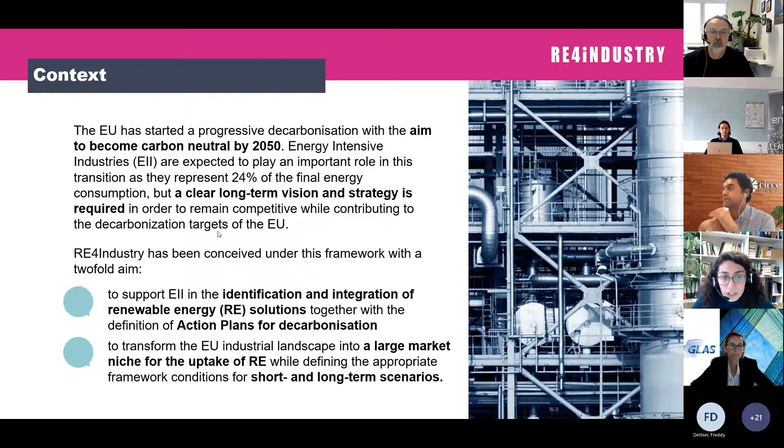You can see some of the goals of the project. I will only name a couple of them, which are really important. The project is really special because we are trying to set up a multi-actor collaborative network, involved and actively committed together, to identify the needs of the sector in order to make this transition possible. What we are trying to do is initiate a stakeholder dialogue where every stakeholder will take part and help us with these decarbonization goals.

Here you can see the general project workflow. Like other Horizon 2020 projects, ours also consists of different work packages, with different activities and tasks involved in these work packages. I'm going to give you more detail about our technical tasks in the following slides.

As I mentioned, what is important about our project is that we have a collaborative network formed by national level and European level experts. We have technical and policy experts, and it's important to have them to show our project results, project progress, and also get their ideas.

What else we are doing is looking at the status of energy intensive industries on country level - Germany, Spain, Netherlands, Greece - as well as on the European level. And we are looking into the best practices for renewable energy integration in energy intensive industries.

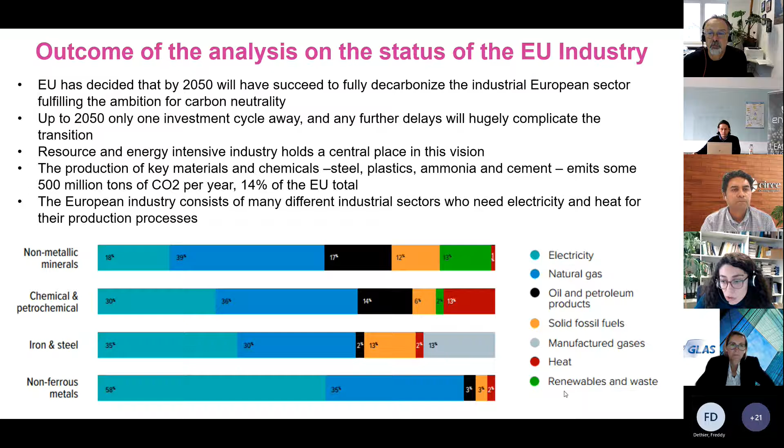When we look at renewables and waste, we don't see them used so often. Only a small part is used in the chemical and petrochemical industry, and 13% is used in non-metallic minerals. This should be another aim - if we want to achieve our decarbonization goals, we have to integrate renewables more in this sense.

Other activities we are carrying out involve looking at case studies of the energy intensive industries which are in the project consortium as well. We are looking at innovative solutions for renewable energy adaptation in these energy intensive industries. Here you can see our case studies: Sidenor, Corbion and Mytilineos.

What we are looking into is that instead of normal electricity, we want to get electricity from green sources, like power purchase agreements, photovoltaics, etc. Instead of natural gas, we aim to replace it with biomethane or green hydrogen. Instead of coal, biochar, even though it has lower efficiency, and instead of steam, electric boilers.

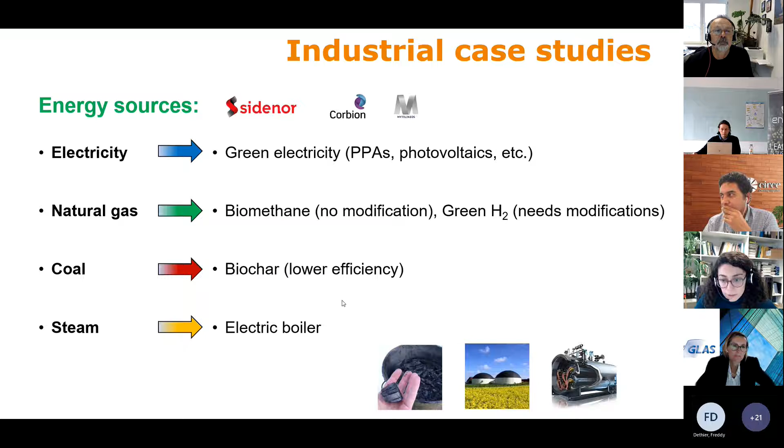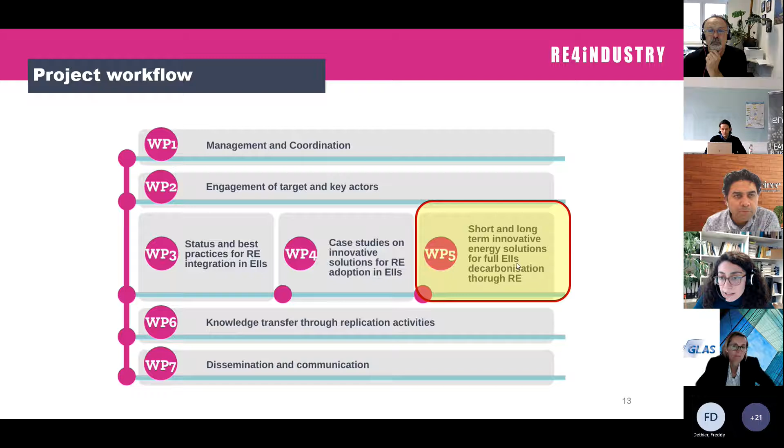And we are also looking at the short and long-term innovative energy solutions. We are developing roadmaps for full energy-intensive industries decarbonization through the renewable energies. Short-term vision is for 2030 and long-term vision is for 2050. We are looking into the technology options, achievable rates, as well as current sector needs.

And here I'm going to recap our RE4Industry actions really quick. We are aiming to have a strong engagement strategy following a multi-actor approach, also starting a dialogue with and within energy-intensive industries and energy-intensive industry organizations. We are also having a thorough review of renewable energy technologies and options for 100% renewable energy production by 2050. Also insights into industry retrofitting, and we are producing recommendations. We are carrying out multiplication and replication tasks, and we are disseminating our results, and we have a solid communication strategy.

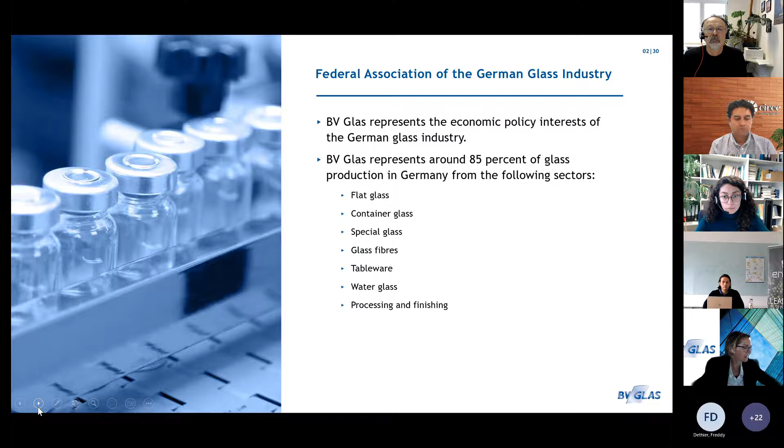So we're the National Association for the German glass industry, representing all the sectors: flat glass, container glass, special glass, tableware, water glass, and processing and finishing. This is our team. I'm the advisor for energy and climate. We're also really active in environment policy, product policy, and also statistics.

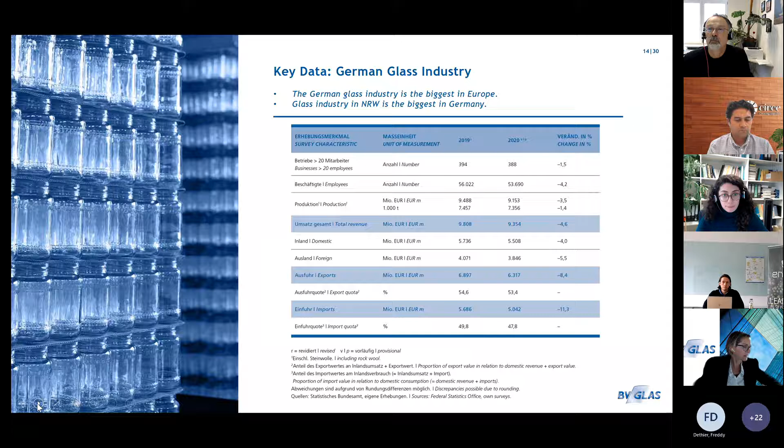I think you also put the spotlight on the final energy consumption. There you can see that especially in the glass industry, you use a lot of natural gas - almost 80% of the final energy used is natural gas. So it's a big part that needs to be decarbonized.

As I mentioned before, there will be electrification, there will be hydrogen, there will be syngas - all the options that need to be explored to make this gray part into a green part as we move onwards to 2045.

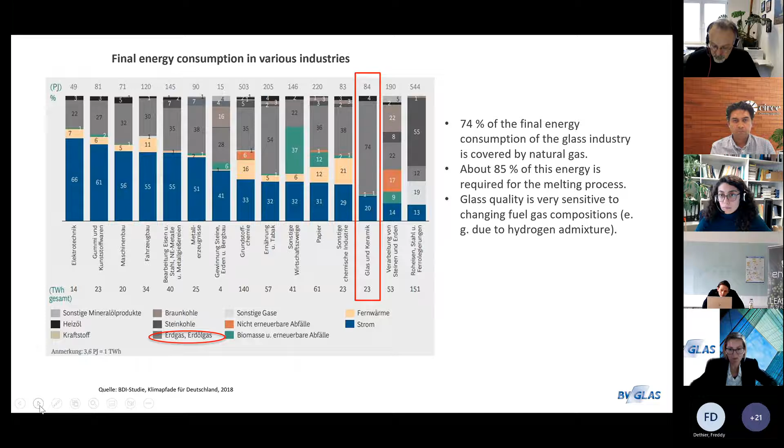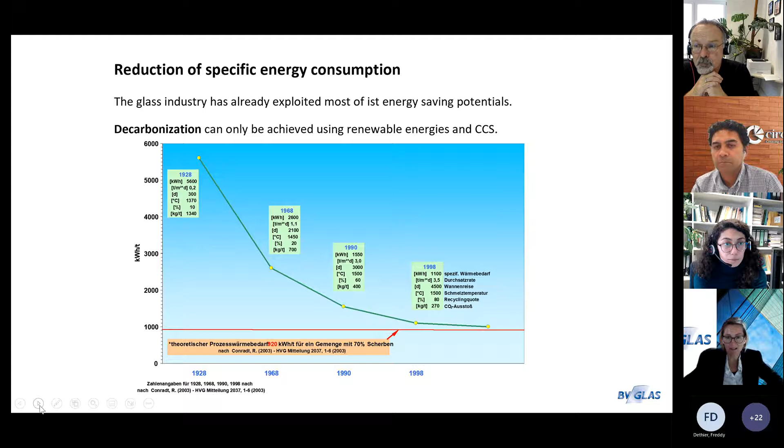The reduction of the specific energy consumption has declined over the last decade, so in point of energy efficiency, we're still working on it. BV Glas itself is leading some energy efficiency networks. We're supporting the national initiative of energy efficiency, but what we do need to focus on right now is decarbonizing the energy we are using.

I'm not sure if I should give you a quick overview of glass manufacturing, because we have so many experts around the table. Just for a quick close-up, we have the glass oven where the raw material and recycled glass cullets are being molten, using up the most part of the energy.

Gas-fired furnaces with electrical boosting are right now the standard. In some cases, for special glass industry or some smaller flaconnage production, there are also full electric furnaces.

But using full electric furnaces is not possible for every kind of glass and not for all sectors. For example, if you take a large flat glass tank which produces up to 500-700 tons of glass a day, you have to have a very high quality of glass, and the chemical process needs to be supported by very high energy input, and the glass has to be really clear. So it's not possible today to build full electric glass furnaces which melt over 200 tons a day.

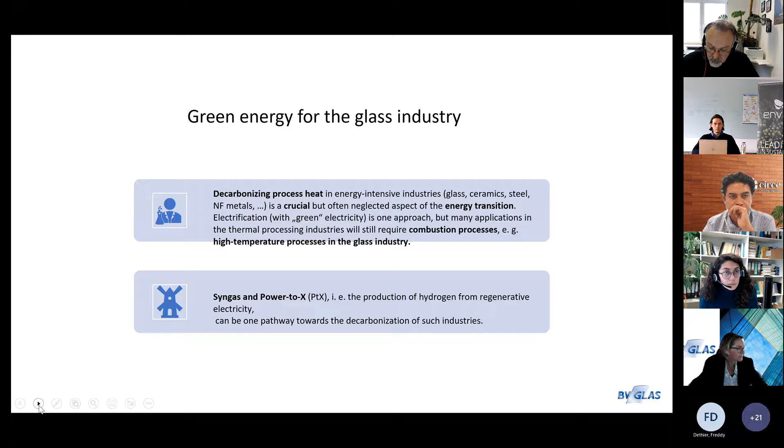Here I just showed a chart, actually from another project, from the project HyGlass, just showing the figures. Right now you see the H2 admixture rate, but of course you could take a sustainable gas also in exchange for natural gas, lowering the CO2 output of the glass industry. In Germany, we're using right now 16 terawatt hours of natural gas and emitting 4 million tons of CO2, just for the overview for the German glass industry.

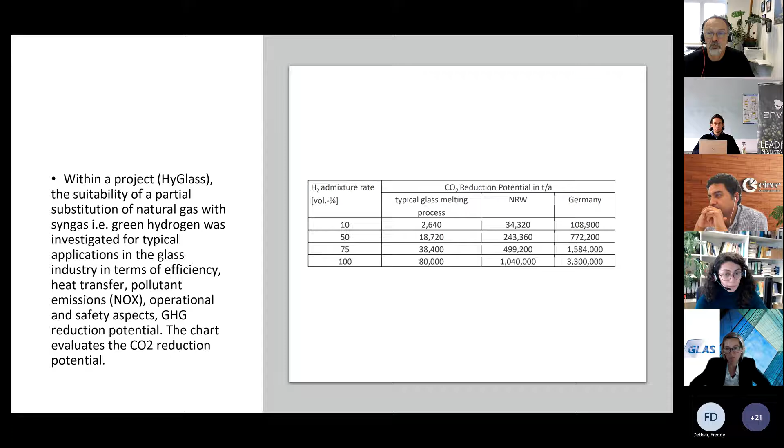So thank you very much for listening. I'm very excited to hear what the technical experts will say, because what we need in the glass industry is a very stable gas.

Because the chemical and physical process of glass melting is highly sensitive, what the people in the factory do not want is a gas that is changing every few hours or every few days, so you do not get the optimal quality. It's a highly efficient process, so what you need is a stable, predictable gas to make the best quality glass possible, supporting energy transitions, high insulating glass, and good products, and to run the oven in a very energy efficient way. You need a very stable gas to support all the technical features you have.

I'm very happy to hear all your technical discussions and input on that. Thank you very much.

Many thanks, Christiane, and thanks also for highlighting that I believe the requirements on quality and purity of syngas are probably highest in the glass industry, even compared to other energy-intensive industries. We will proceed with the presentation by Hendrik Steinort from Enviva, who will talk about green carbon security, cross-sectoral bio-based defossilization of hard-to-abate industries. Hendrik, the floor is yours.

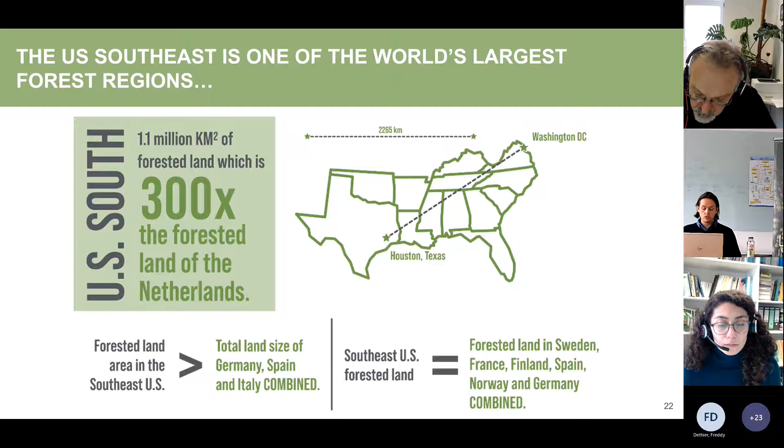Then we have set different priority criteria on how we should use biogenic carbon, and the first is, of course, optimization of recycling rate - what is the existing biogenic carbon in the value streams in a particular industry?

And then in the end, we can use biogenic carbon capture and storage and utilization in order to use maybe the residual carbon streams, such as CO2, for higher value applications, for example in syngas. Then priority 2: use of biogenic carbon sources.

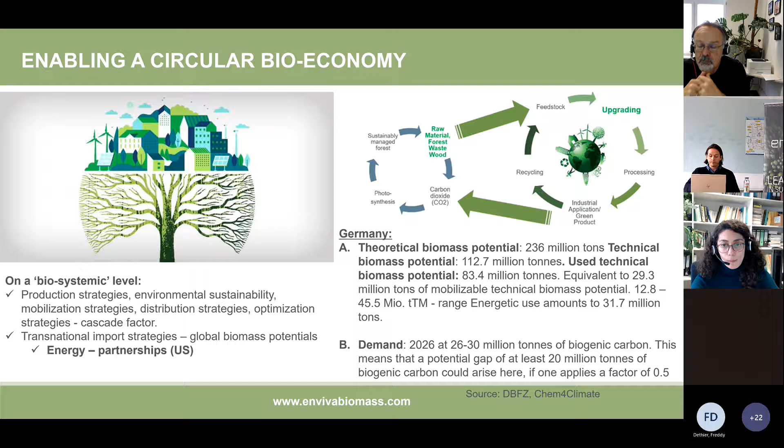Then I want to go quickly to the actual use case of these biogenic carbon resources, in the form of bio-to-X. We have biogenic carbon, and we transform it to X.

For example, syngas for heat processes in the glass industry. And here we have basically the climate champion: wood pellets. It's a defossilization platform, it has zero carbon cost, and a very homogeneous quality.

It can be used for process temperatures up to 1,600 degrees, and it is available at scale globally — 50 million tons, with an upward trajectory in the next years.

And then the biogenic carbon can be used as a green carbon source for biopolymers, for green heat, syngas, biomethane, bio-SNG for the glass industry, green hydrogen, but also for biomethanol.

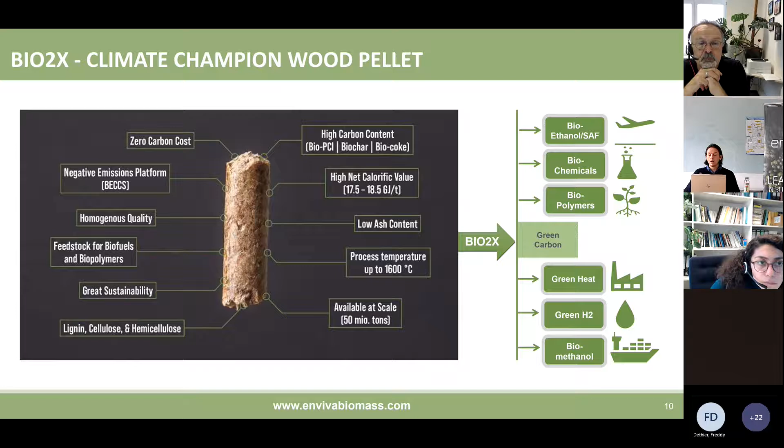And what are the strengths, apart from those I just mentioned? We all understand that we're in a carbon-constrained world, and the carbon-intensive economy will not go away. Decarbonization is looking probably more at the energy sector, but we need for all of these industries a strong carbon basis that is regenerative, renewable, and sustainable.

And the fossil infrastructures, for example in the glass industry, the ceramics industry, but also in the cement and lime industry, and in the steel industry — if these technology pathways are scaled up, they can be recycled.

There can be low cost, low capex implementation of renewable infrastructures in formerly fossil infrastructures. And we also can use hybrid systems where we have natural gas and mix it with syngas, for example, derived from biomass gasification.

One very crucial thing for capex investments and long-term OPEX is investor security. That can only be achieved if you have a global supply that is reliable, long-term, and maybe even at a fixed price. And sustainability remains at the heart of the transformation - we can't go beyond the criteria set out by RED3.

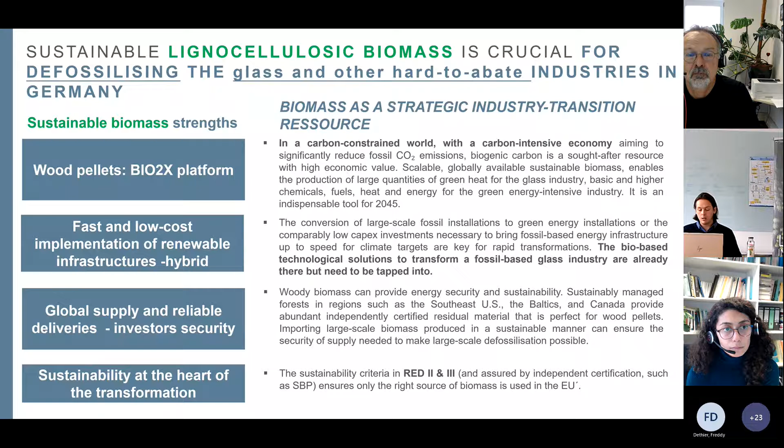Here we have another overview of what wood pellets as a defossilization platform can be. For us, relevant is syngas. It can be used as a process heat reducing agent, but also as a precursor for other higher value chemical platforms - around 10 to 12 gigajoules per normal cubic meter. What's crucial, depending on the process, is that for 1 kilogram of wood pellets you can probably produce 2.4 kilograms of syngas. That gives a sense of the scale.

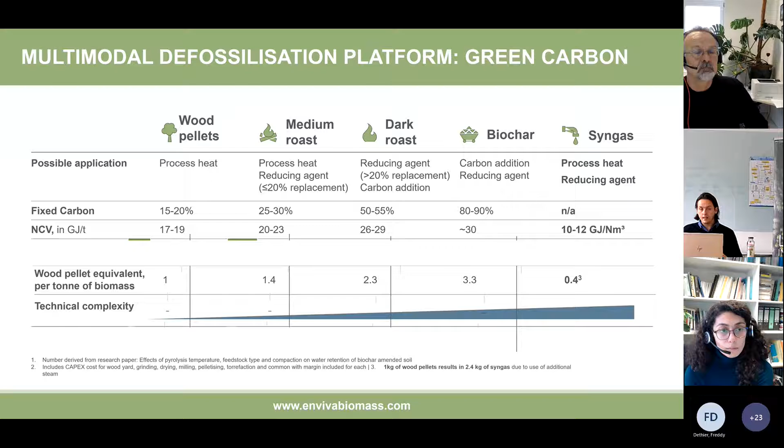Now we go to scalable biomass gasification. It's a very interesting modality to potentially defossilize the glass industry. It can be used cross-sectoral, not only in glass, but there are symmetries in other industries like ceramics, lime, steel, and cement.

We can either look at an approach where gasification is used in-house, creating value in-house, or a contracting model where you bring in external expertise, which will accelerate the transformation process while also looking at future applications of that process in these industries. That's also coupled with HR expertise transfer and professionalization of these industries.

We have different technologies on the market - fixed bed gasifiers and fluidized bed gasifiers. Later we'll hear about some of these technologies and how we can use them. Biomass gasification is more efficient than fermentation because you can scale it and it's immediate. Fermentation to produce biomethane is an established process, but if you want to scale it for a given industry, biomass gasification is the fastest pathway to scalable amounts of syngas, which can be upgraded to bio-SNG or biomethane as an equivalent to natural gas.

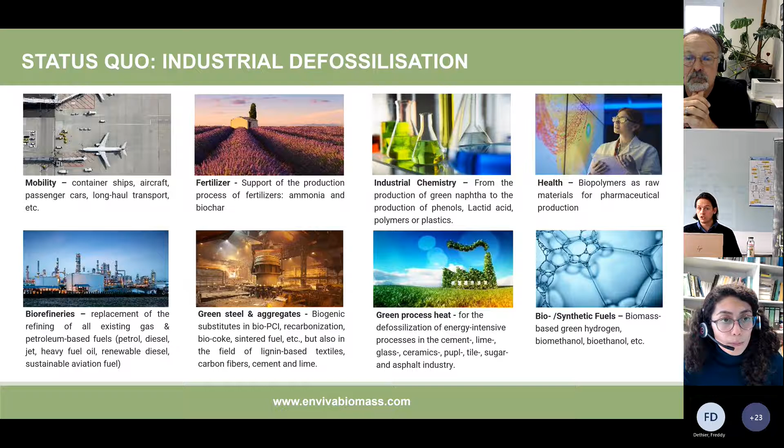Last but not least, at the very tail end of this process, if you have biogenic CO2 - renewable CO2 coming out of the process - and you capture it, then the glass industry can become a climate positive industry. By 2045, Germany will be climate neutral, but until then we'll need negative emissions because there are some emissions we can't easily abate. So that's something to keep in mind - why biogenic CO2 also generates additional value for these industries at the end of the process.

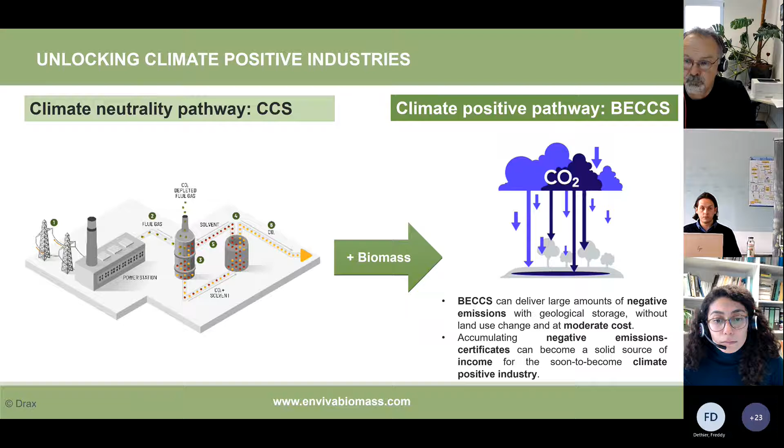Sustainability is the most crucial aspect of this value chain proposal. The biomass provided from different providers can rely on sustainability criteria such as FSC, PEFC, Sustainable Forestry Initiative, SBP - Sustainable Biomass Program - or the Tree Farm certification scheme. At Enviva we have a responsible sourcing policy that can only source from growing forests.

With track and trace, you can trace back with a satellite-based GPS system every ton of wood delivered to you, down to the plot where it was harvested. We also have a fund for high biodiversity plots, and we actively contribute to reforestation there.

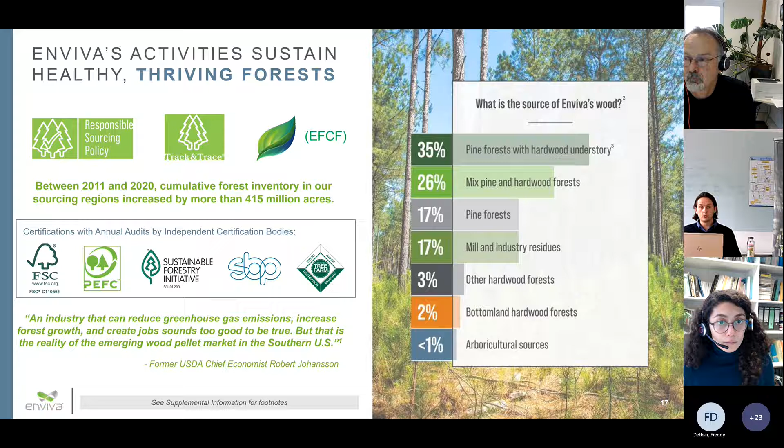Many thanks, Hendrik. I would have one question concerning the current development on European level on sustainability aspects, namely the discussions towards RED3. This will be nothing new to you, of course. The keyword is this primary biomass issue. Would you be bold enough to say a few words there? How is your approach? It might affect your business model, no? Yeah, that's a very actual question.

I could go into the details, but I think I'm going to look at the meta level. 80% of the renewable heat currently produced in the European Union is derived from biomass. 50% of that is derived from primary woody biomass. If they got rid of it in the next 2 years, there would not be any renewable heat for Europe. What we've seen in the difference between the position of the Commission, which was quite in favor of the status quo in RED2, is that the European Parliament followed more or less the recommendations set out in the ENVI committee, which later went into discussion with different committees in the European Parliament. The European Parliament in the end decided to go for a vastly de-radicalized version of the ENVI committee's proposal.

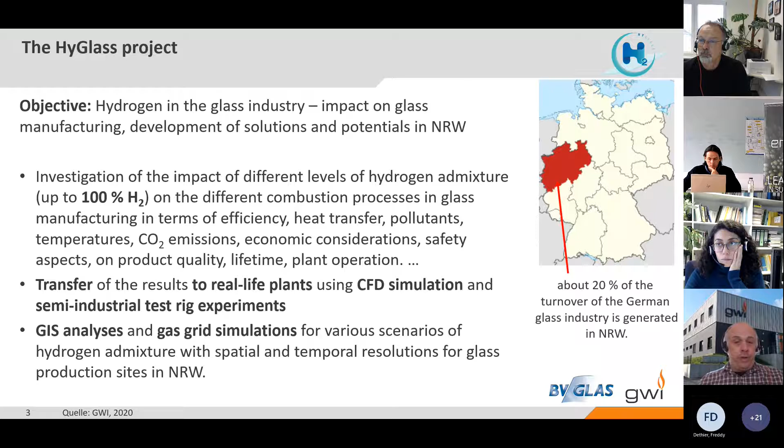What we also wanted to do was transfer to real life plants based on information we got from computer simulations and also from semi-industrial test rigs. So we ran a lot of experiments, and we also did what's called a GIS analysis - we looked at geographic data to look at various scenarios for hydrogen for glass manufacturers in North Rhine-Westphalia.

I'll skip over this, it's already been explained. So we have many different combustion processes, also many different combustion technologies here. A glass melting furnace will behave differently with hydrogen than, for example, a feeder or an annealing lehr. This is something we have to take into account.

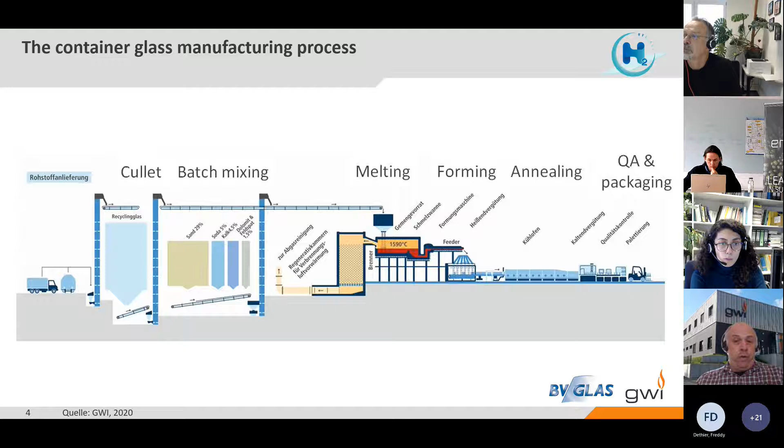And of course we have to take the quality of the fuel into account. Hydrogen and natural gas are very different fuels. You can see that if you look at the calorific value of hydrogen, it's about 1/3 of the calorific value of natural gas, which means you need about 3 times the higher volume flows to produce the same amount of heat. At the same time, we have a reduction in the minimum air requirement.

What it means is the flow patterns in the combustion chamber change, mixing of fuel and oxidizer changes, the flame changes, the heat transfer changes. We have other aspects - a hydrogen flame with air is significantly hotter than a natural gas flame.

So we have to think about NOx emissions, for example. That's the bad news - we have to expect higher NOx formation. The good news is it's still the same formation mechanism, so we can use many of the technologies developed over the years to reduce NOx formation in natural gas combustion and apply them to hydrogen combustion or to the combustion of blends. We don't have to reinvent the wheel here, but this is something we have to keep an eye on.

The laminar combustion velocity, this is SL, is something that's actually only relevant for the premix burner. So this is something we have to think about in feeder systems in the context of the glass industry, but it's actually less relevant for the melting furnace, which is good news, because if you look at the numbers there are significant differences here - really something to keep an eye on. But for the melting furnace, which is the biggest part in terms of CO2 emissions and energy consumption, this is actually less of a concern.

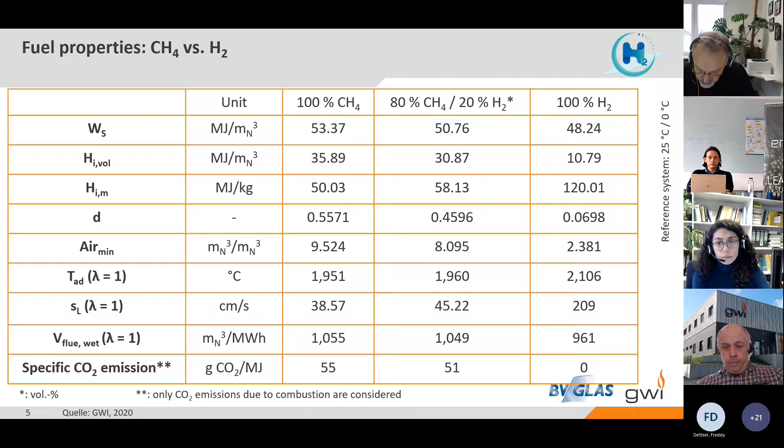We can have firing rates here up to 1.2 megawatts. The biggest glass melting furnaces that I know go maybe up to 100 megawatts, so there's of course still a scale issue here, but it's better than a lab scale experiment.

What we can do here is provide air preheating up to 1250 degrees, which is reasonably close to what you'd see in a regenerative glass melting furnace. We can achieve furnace temperatures up to 1600 degrees, also typical of a real glass melting furnace. And we can go to hydrogen levels of up to basically 1 megawatt of firing rate, so we could operate this furnace with pure hydrogen alone.

We also did melting experiments, melting glass samples of different qualities to see how they are affected by changes in the combustion process. Because at the end of the day, as a glass manufacturer, your primary focus is not decarbonization, your primary focus is to produce glass to a given quality. Decarbonization is just an additional complication in your daily work.

So they want to know if they switch from natural gas to hydrogen or biogas or whatever, how will this affect their product, and what can they do to maintain the quality that they have to.

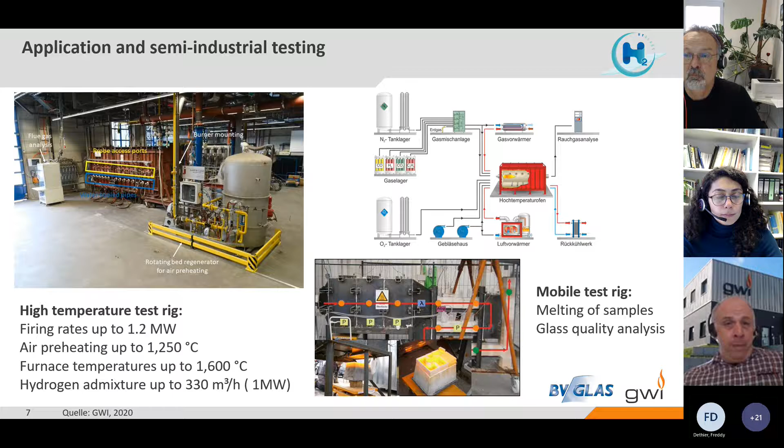We ran a number of measurement campaigns. This is some impressions of our first measurement campaign in December.

One of the things that people often forget is how logistically challenging it can be to run large-scale experiments with hydrogen, because you have to have a lot of hydrogen, so it's going to be expensive. You need to have the trailers on site.

We ran experiments for a firing rate of 500 kilowatts with an air excess ratio of 1.1 and an air preheat of 1150 degrees. That's basically what you see in a regenerative glass melting furnace.

Our furnace is quite flexible, so we were able to recreate an underport configuration, which is typical for such furnaces. It's also something that you only find in the glass industry, so that's something to keep in mind. Process industries are very, very different.

Furnace types that you see in the aluminum industry are probably not something that you'll find in the glass industry, and vice versa. And if you talk to ceramics, again, they will have different technologies there. So that's also something to keep an eye on.

But in this context, we were able to really recreate regenerative glass melting furnace conditions, and we ran 2D field measurements, and also tested different control scenarios.

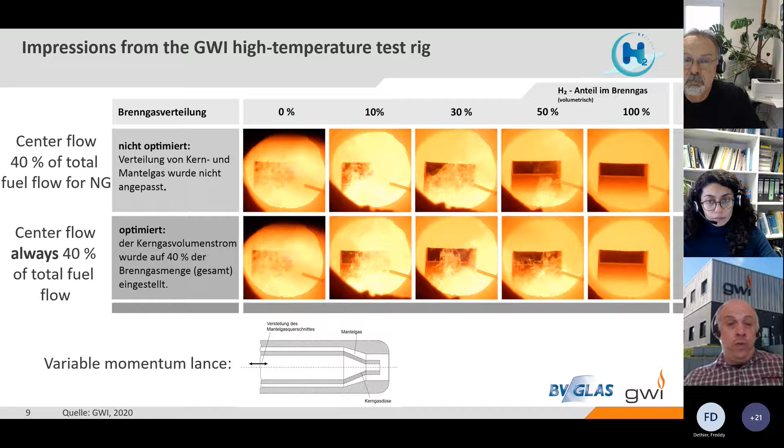We carried out measurements. These are temperature measurements from the horizontal burner plane. This looks a little bit weird at first sight, because it seems as if with higher levels of hydrogen, we have a reduction in temperature, which is unexpected.

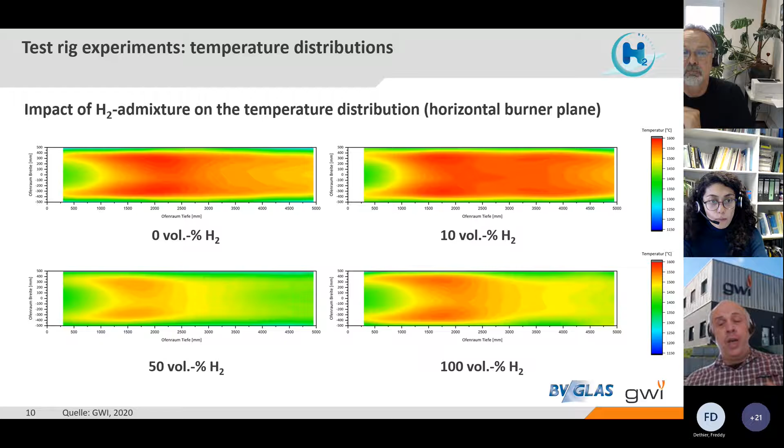The reason for this is that this flame is moving out of the measurement plane, so we don't catch the maximum temperatures anymore in the horizontal burner plane. But we do know the hydrogen flame is actually hotter because we can see that from the flue gas emissions. These are measurements from the flue gas, basically from the chimney.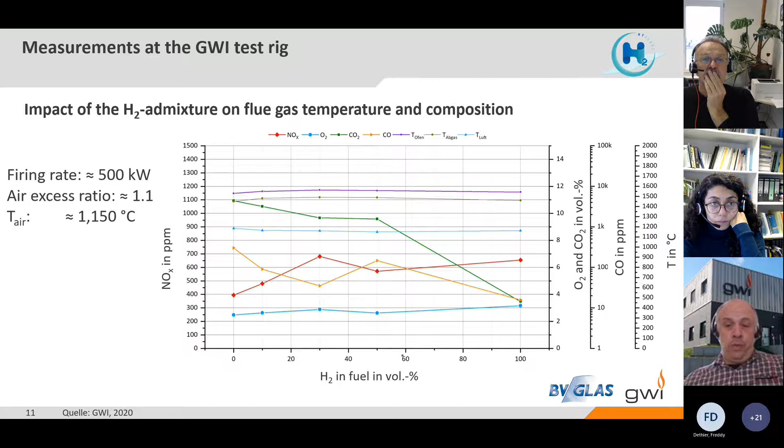We did melting experiments. This is the small test rig that we use for that, so we are able to introduce samples of different glass qualities into the running furnace to do melting experiments.

We had our colleagues from HVG analyze the glass samples. I am not going to go into detail here because this is really not my area of expertise. For me, glass material science is basically black magic or alchemy or whatever. But there are effects there which were expected.

You can see that with different levels of hydrogen, we see some changes in the color. This is not unexpected, this is something we can probably deal with. What was also interesting was that we saw some increased soot formation at some levels of hydrogen, which is something we cannot yet explain, but it's also something that other people saw, so we're not the only ones there.

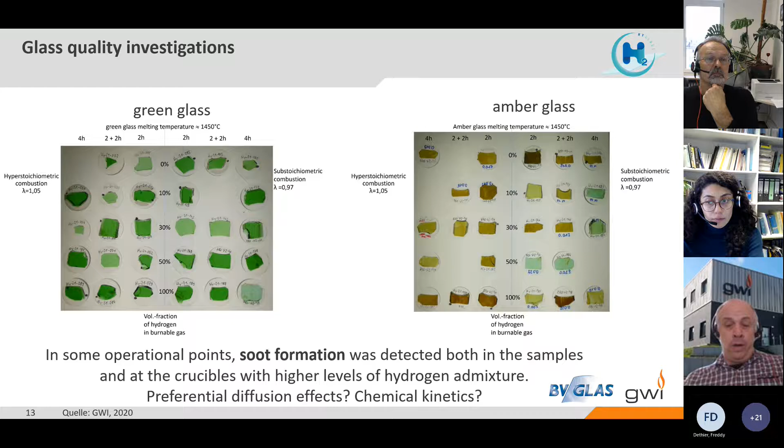And we did computer simulations to transfer this knowledge to real-life furnaces. So this is a computer simulation of a real-life glass melting furnace located in southern Germany, obviously a little bit bigger in terms of firing rate, 12 megawatts.

But you can see also here, if you keep the firing rate, the excess ratio, and the air preheat temperature constant, then the impact on the temperature distribution in the furnace is relatively similar. We still have higher maximum temperatures, but overall you can do a lot with combustion control here.

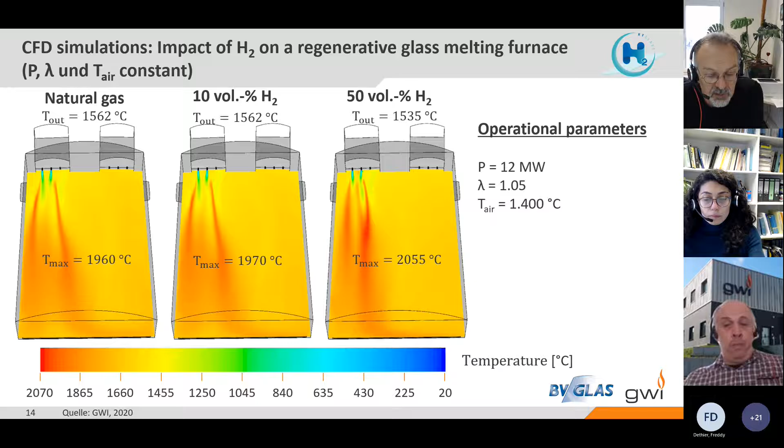We can see that as well when we look at the heat transfer impact factor, basically the heat going into the glass melt compared to the reference case with natural gas. Here we have relatively stable heat transfer going into the glass melt. We still have a slight increase in NOx emissions, so this is something we have to keep an eye on, but it's technologically manageable.

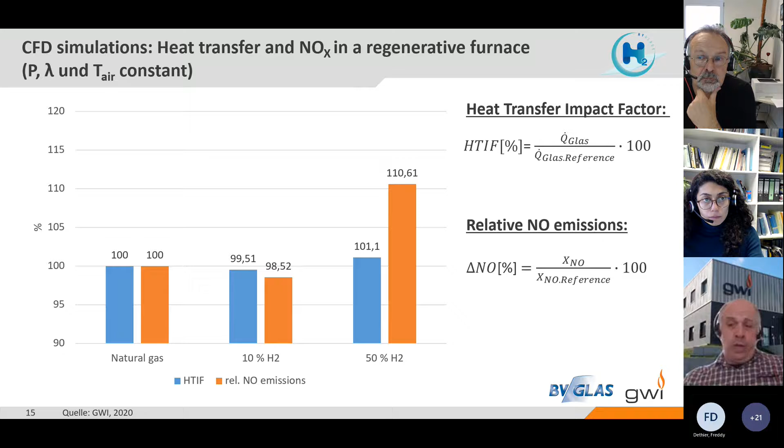Last but not least, in the context of hydrogen, we also looked at the question of supply, because at the end of the day these systems have to be supplied with energy. You cannot simply switch off a glass melting furnace. So we used GIS, Geographic Information Systems, to look at 9 locations in North Rhine-Westphalia where there are glass manufacturing companies.

We looked at the vicinity in terms of what's there in terms of wind turbines and PV panels, at different distances, 10 and 20 kilometers, and very optimistically assumed that these wind turbines and PV panels are only there to produce electricity for us to produce hydrogen, which is of course a little bit naive, but it gives us a first assumption.

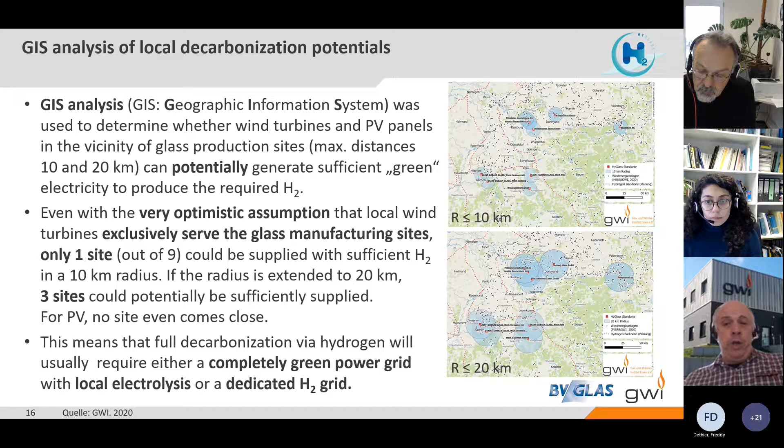Even with this very optimistic assumption, we saw that with one exception, the local potential for hydrogen production just isn't there to significantly substitute for natural gas. That's an important point. When we talk about energy intensive industries, we will need some kind of green infrastructure, be it a green power grid or a dedicated hydrogen grid, in order to provide the amounts of energy we need reliably. That's really one of the main findings of this project - infrastructure really is important here in order to decarbonize energy intensive industries.

First of all, we have the main properties changing, like the calorific value, Wobbe index, density, things like that, which will have an impact on the flow field, on the mixing, on the actual combustion process, on heat transfer. And then we have also trace components, like ammonia, for example, or H2S or something, which means we have to think about pollutants like SOx, NOx, things like that, but also potentially interaction with the glass melt.

So we had a project, or actually two projects, called Biogas Glass 1 and 2, where we worked with a few partners, HVG, which is the German Association of the Glass Industry, FGF, which is an association for refractory materials, and also Verallia, which is a glass manufacturer. So we wanted to see if it's possible to use raw biogas, so not upgraded biomethane, but really raw biogas for glass melting, both on a technological and economical level.

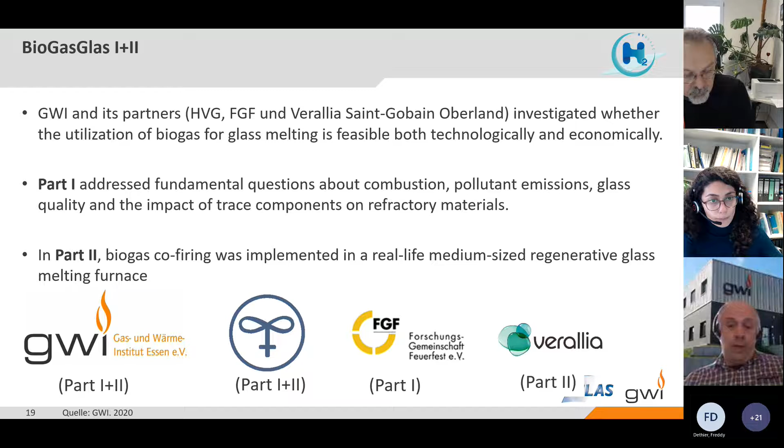We had two projects. The first one looked into more fundamental aspects, and then in the second part, we actually implemented this. So we used a real-life, medium-sized regenerative glass melting furnace. We connected it to a biogas plant, and we were able to supply about 30% of the energy demand from this biogas plant. We were lucky because Verallia had a smallish glass melting furnace right next to a biogas plant, so we were able to just build a small pipeline to connect the biogas plant directly to the furnace in order to provide this energy.

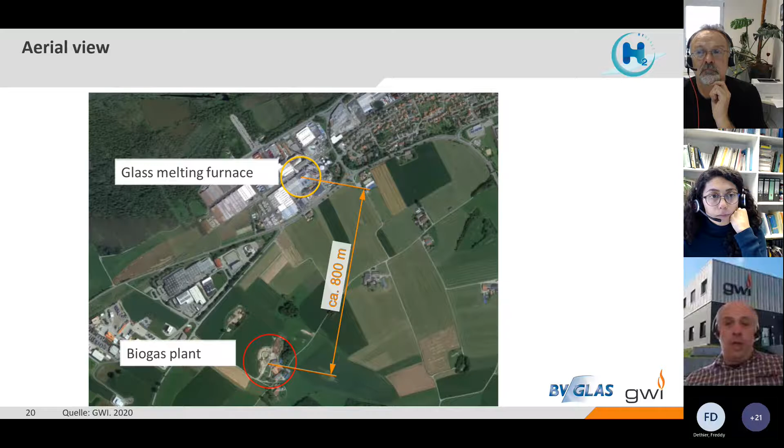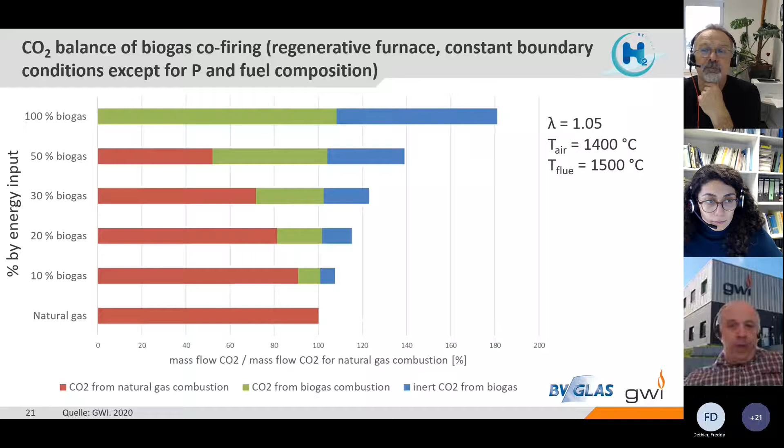So obviously, but you have to take a few things into account. You lose a little bit of efficiency here.

And overall, to come to a conclusion, yes, we have to think about decarbonizing, especially high temperature process heat. Hydrogen is an option here. Biogas could be an option here. There will not be one size fits all solution. We will really need to look at the local situation. We will need to look at security of supply. It is doable. I think technologically, you can use hydrogen. You can use hydrogen natural gas blends. You can use biogas or syngas. On a technological level, a lot can be done.

We have to think about, of course, the origin of hydrogen. It doesn't make sense to use gray hydrogen for decarbonization. That just shifts the emissions. And when we think about biogas, it's also an option.

We saw no negative impact on glass quality or also on the refractory, which is also a concern. This was confirmed by investigations at a real-life industrial site, but in the end, one bottleneck is really providing sufficient amounts of biogas. That's certainly an issue because, again, the amounts of energy that we need are substantial.

And there are also some regulatory hurdles. In this context, for example, when they wanted to switch from research mode to normal operation mode, because they actually wanted to continue this injection of biogas, the local authorities told them that they don't know how to handle that. They can handle pure biogas sites, they can handle pure natural gas sites, but if it's a mixed operation, they don't know how to do that. So they wanted to consider this like a municipal incineration plant, and that was the end of the game because that has all kinds of additional requirements.

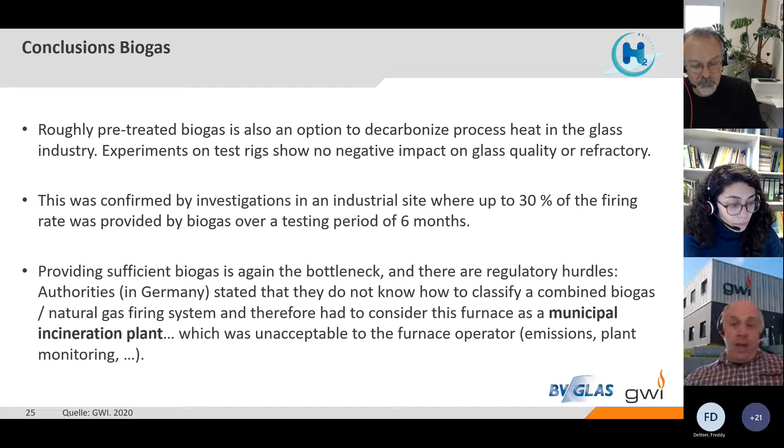Thank you very much, Dr. Leicher. No, very, very interesting. I would open the floor if there are any questions to Dr. Leicher at this stage. We said we would try to give the floor for some technical discussions. Are there any questions?

Actually, from my side, I have two. These are not technical questions, but I would like to ask you why. What was the reason why you did not focus on biomethane instead of biogas? Yeah, okay. And then the second one is.

Now we know there is a sense of urgency, and you are looking at the issue from the technical side. However, the main bottleneck is the supply side. What is your feeling about the time frame? If we really put all the eggs in the baskets, and if we get together, when can this substitution take place?

The simplest question first: why don't we look at biomethane? Biomethane has to be of comparable quality to natural gas. If I burn biomethane or natural gas, technology-wise it's hardly any difference, maybe some minute differences in trace components. But biomethane has to fulfill the same quality criteria as natural gas, otherwise you cannot inject it into the grid. The idea was, if we can use raw biogas or roughly desulfurized biogas, we can skip this energy-intensive part of upgrading the biogas. So we looked at a blend of 50 to 70% methane, the rest mostly CO2, to see if this works, because biomethane is, from a combustion perspective, basically natural gas. That's a kind of no-brainer.

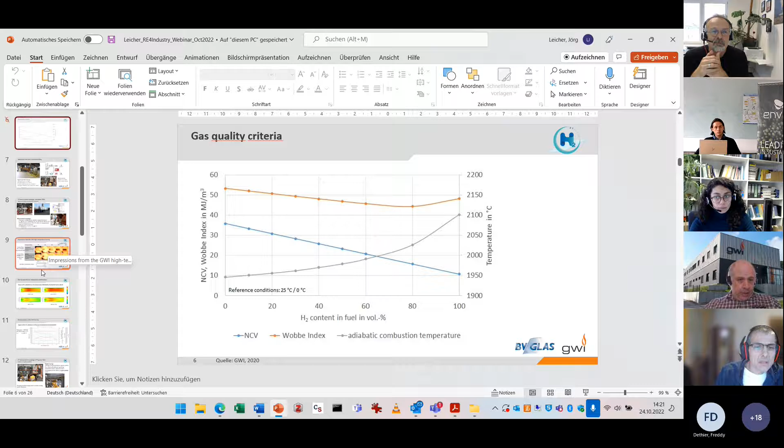That's a challenge. But can we go back to the slide where you see the NOx emissions? I don't know if I saw correctly. Yeah, I think no, it's not this one. That's not this one. It's there, it's this one, lower.

One thing we have to keep in mind, which hasn't been included in this presentation yet, is the way that we measure NOx. We measure NOx dry. We take a gas sample, we take out the water vapor from the combustion because the sensors cannot handle humidity, and then we measure the rest. If you do this with hydrogen, you're at an inherent disadvantage because you produce more water vapor when you burn hydrogen than when you burn natural gas.

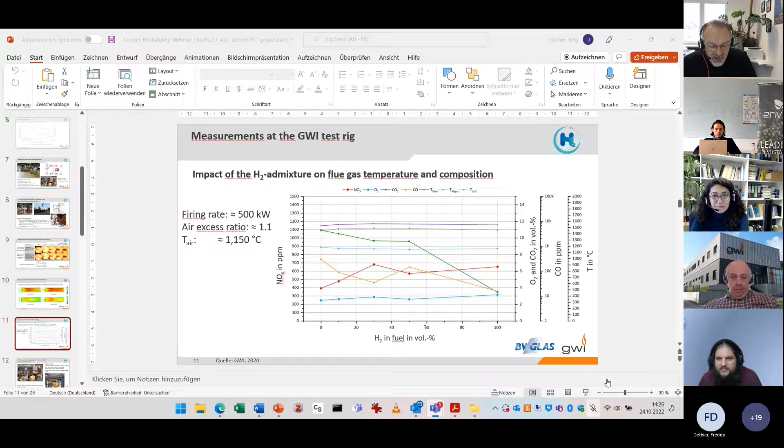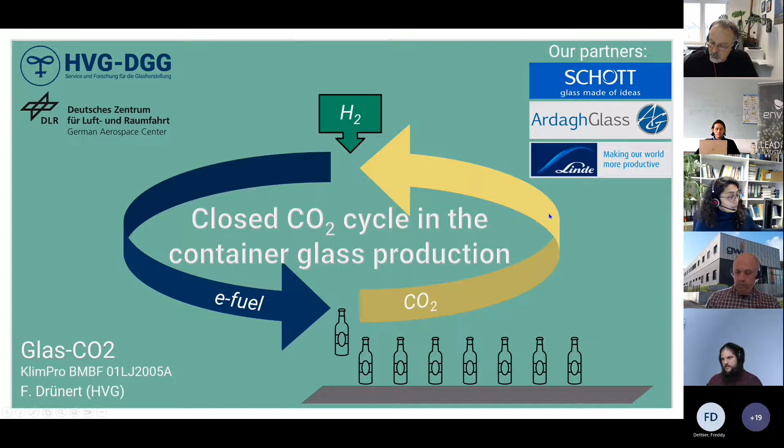This is a project together with HVG and DLR, and we have a couple of partners: Schott, Ardagh Glass, and Linde. Our main objective for this study is to show whether it's possible — can we combine these technologies?

That means technology chains. Basically, we select the fitting technology chains, and we want to show some cost estimations, of course focused on the glass industry.

And there are a couple of benefits. As I said, we have zero CO2 emissions and a fuel net production. This fuel net production comes because we have process CO2 emissions. We use carbonates for glass production, and these carbonates have to be dealt with.

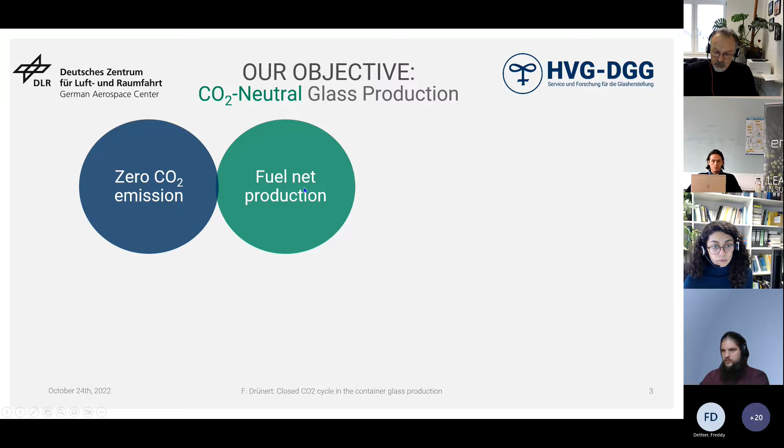Another benefit regarding the fuel is, of course, that we can store the fuel for emergencies, like if we have no electricity or whatever. We use only electricity for our modeling, which means we are only dependent on the raw materials for glass production, that is, cullet and batch ingredients. And we have a modular build, so in theory we could outsource the different parts of the model to different companies.

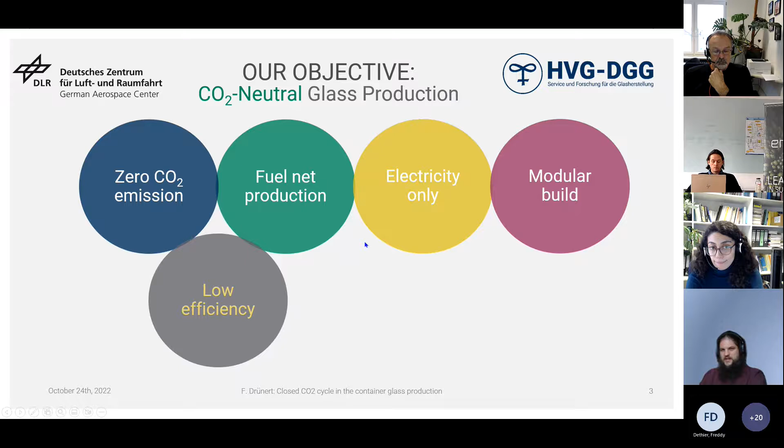Of course, we have a couple of drawbacks. With this attempt, we could also instead just burn hydrogen. With all these modular builds, we have a comparably low efficiency. It's a comparably high investment, and we have high complexity.

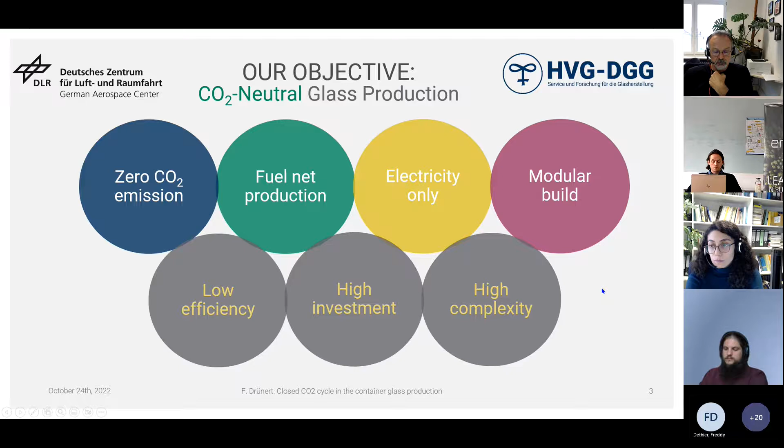So I want to guide you through the process that we imagined. We start everything with a glass furnace. The glass furnace produces a lot of CO2 and a lot of glass, and needs a lot of heat, and has a lot of waste heat as a result.

We assumed an oxy-fuel process, 300 tons glass production per day, and a heat recovery system in the middle. From the heat recovery system, we need to get the fuel first to heat the glass furnace. I will go backwards in case you wonder.

So the fuel in this case, as a very first attempt for our calculation, is methane. Methane because it is the stuff the glass industry knows today. It is not the one and only solution, but it is the solution we have the most knowledge with.

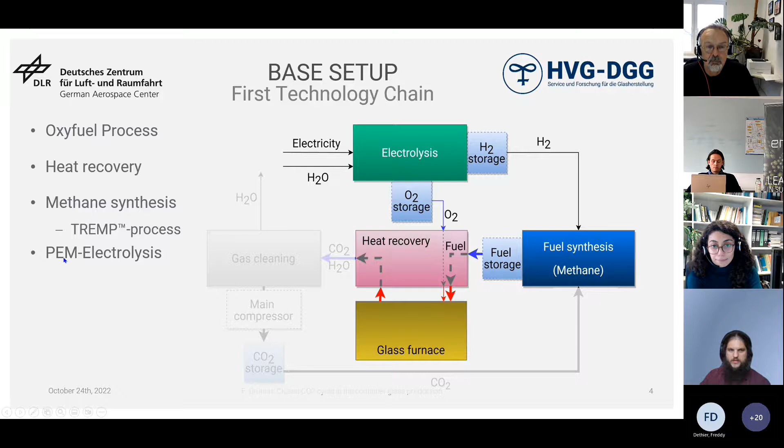The methane will be synthesized by a Sabatier process, which is of course an exothermic process, so we will also have to integrate that into the heat recovery system. And that process requires hydrogen that is produced by an electrolyzer. In this case, we calculated everything with the PEM electrolyzer, and we need some CO2.

The CO2 comes from the furnace, runs through a gas cleaning process, and we have a couple of stages. That is a wet scrubber. Please don't hurt me, glass industry people, because wet scrubbers are not very favorable. However, we need very, very low amounts of pollutants, and that is only possible with wet scrubbing in our first optimization.

After that, we need some hydrogenation to get rid of further oxygen, and some guard beds to reduce the levels of sulfates, sulfur, and halogenides to about 10 ppb. We need these low levels to protect the catalysts, which we need for the fuel synthesis. So this is our setup that we want to talk about.

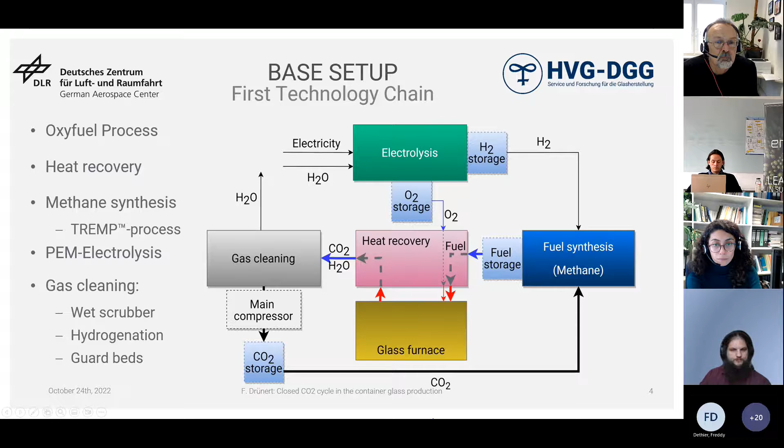Our general approach is we have three basic tools that we use. We use a Python simulation to assume the amounts of matter that flow around and the amount of heat. We use Aspen Plus for the process simulation, and the DLR has their own techno-economical analysis tool, called TEPET, which uses the input of Aspen Plus to estimate the cost of the different pieces in the setup.

For the economic assessment, as I said, 300 tons of glass per day, we use methane as an e-fuel, and we calculated everything for the year 2020. 2020 is, in this case, the better option than 2021, because the electricity pricing in 2021 was not very evenly spread.

Of course, now the electricity prices are higher, so we have to recalculate everything for the next year, but we prefer to use the year 2022 for our next calculation step because this is a more even approach. The glass furnace, of course, has to operate 24/7, 365 days, and we use an interest rate of 7%.

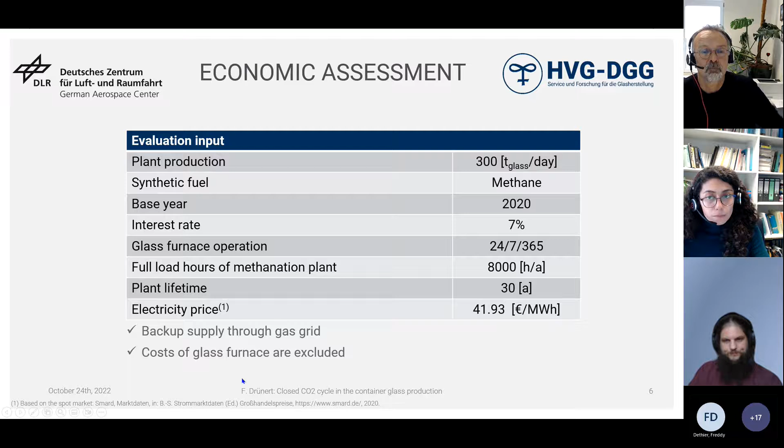So now, if we look at the fixed capital investment cost that we estimated for this approach, we can see that we have approximately 100 million euro required to build that system in 2020. And this is quite a lot, most of it is for the electrolyzer.

All the stuff that we need for the glass production, the gas cleaning, that is comparably low. We need about 10 to 12 million for wet scrubbers, and the rest is for the other cleaning parts. But the electrolyzer is the major point.

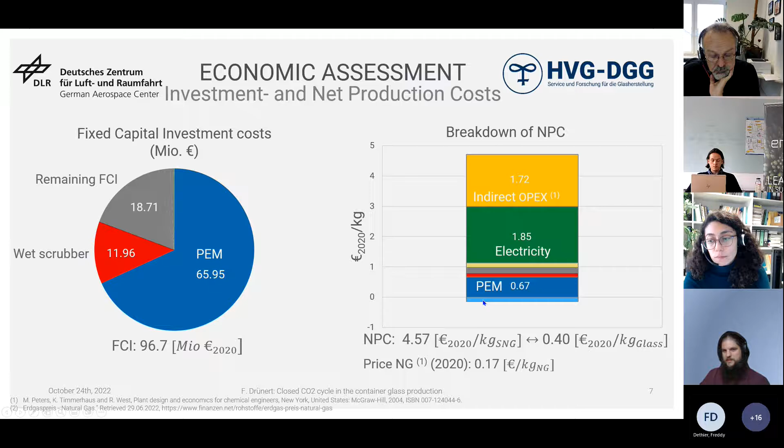And if we look at the net production cost, we can see that even the PEM module is not the most important part, but even more expensive is the electricity.

So if we sum everything up, we can use this modular build to produce synthetic natural gas for a price of approximately €4.60 per kilogram. If we compare it to a kilogram of natural gas nowadays, that's approximately 17 cents, so it's more than 10 times higher.

However, we have to keep in mind that now we produce electricity with gas, at least a bit. But here we produce gas from electricity, so we have a completely different conversion cost. It is very comparable with other estimations for e-fuel synthesis, which are usually about 1 to 10 euro per kilogram.

So we studied the case a bit further.

Since we are able to store the gas, we checked the day-ahead market prices for electricity for the year 2020, and we thought, what if we only use the cheap electricity and not the high prices?

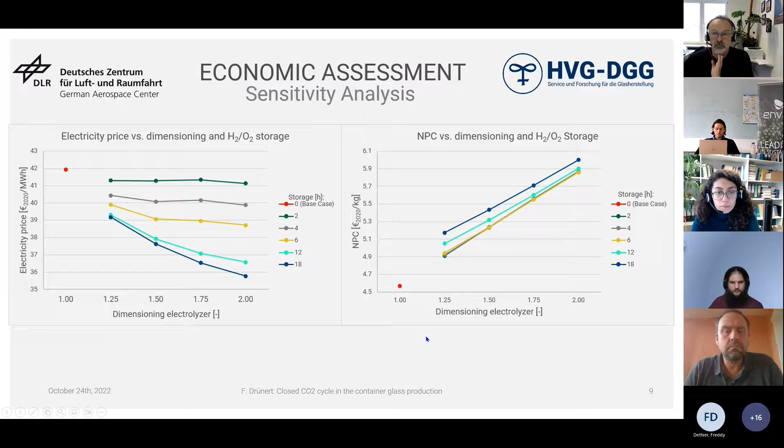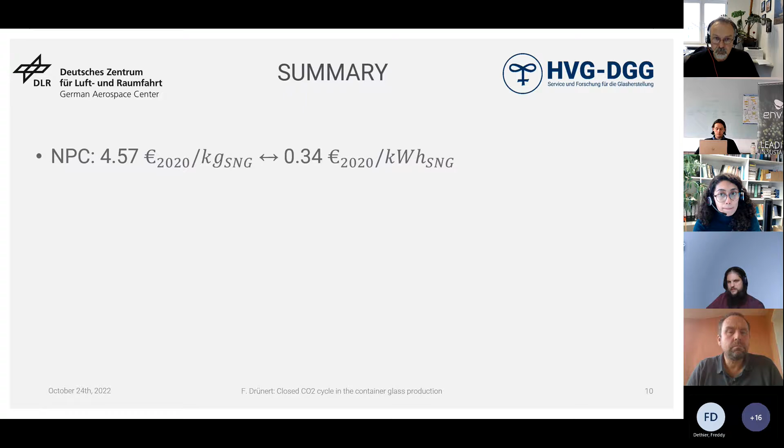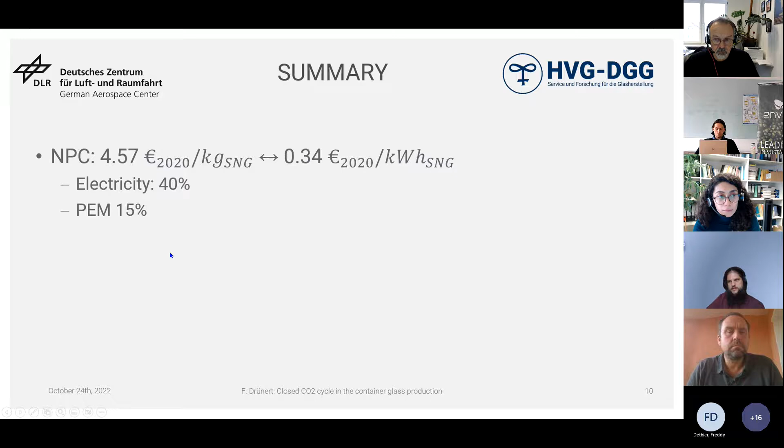So from the summary, we can produce synthetic natural gas. We can use synergy effects, and we can get a price of about 4.6 euro per kilogram synthetic natural gas. 40% of that price is electricity, the PEM electrolyzer is about 15%, and using storage and over-dimensioning is not economically viable in 2020.

If we look at 2021 or 2022, where we have much more fluctuations, this could be a lot more feasible. We can't wait for the end of this year to calculate the same thing with the higher fluctuations of electricity pricing. First attempts show that we can save quite some costs by that.

So this is the first step of our estimation, and we will continue further with more different setups to compare. One of these setups will be methanol, another will be syngas as well. So we're definitely looking closely at the syngas.

Syngas, for example, is an important factor for this optimal system. Also, saving of energy or heat recovery is a very important system consideration, because with high energy prices, this will have much more impact.

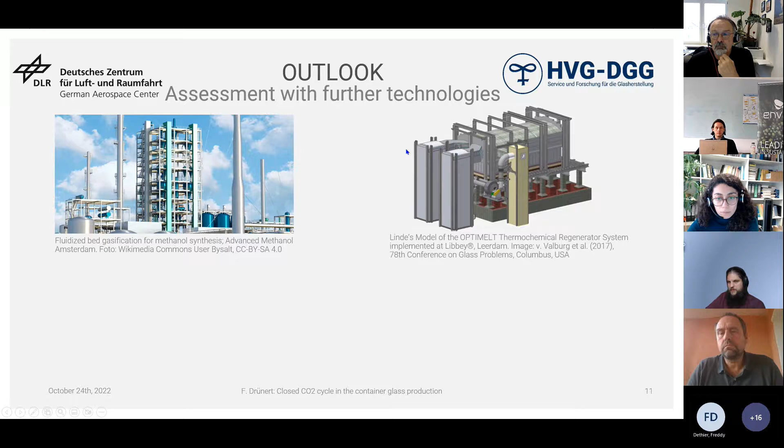And the last connection to syngas: if we use a SOEC system where we could use co-electrolysis of CO2 and water at the same time, we could directly produce syngas, and we are much more flexible with the process. We can much more easily produce other fuels and sell that to potential buyers, so this will increase the flexibility of the process quite a lot.

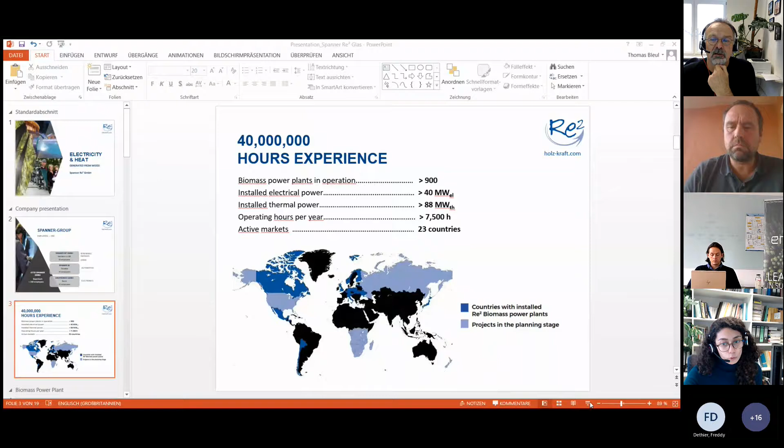Is it working now? Yeah, we don't see presentation mode, and now you're on slide 3. Oh, I see presentation mode. That's fine. Well, if it's working like this, it's okay. Should I go ahead?

I'm not quite sure whether the presentation will be moving. Is it moving now? Nope. No, then maybe I can share it, or maybe Olgo, you try. And Thomas, you just tell Olgo when.

Maybe we are good in syngas and not that good in presentation. Maybe also your computer is on holiday mode. You never know. Maybe I'm trying.

How do you see it? Not the presentation so far. You don't see my screen as well. No, we see your Explorer. Oh. How? Just a second, sorry.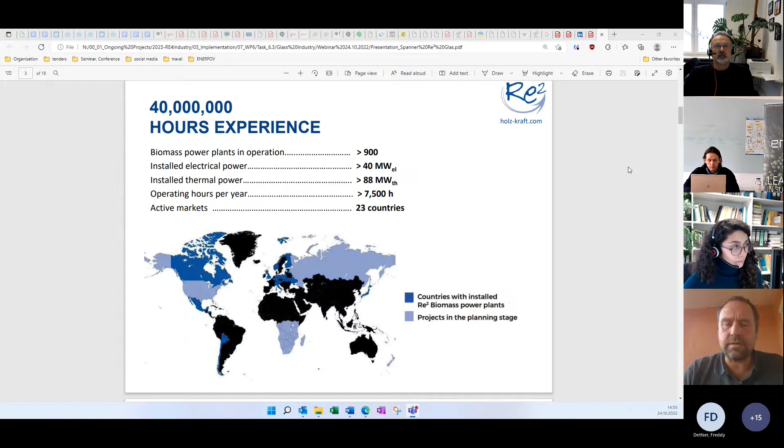So we are coming out of the automotive area. We enter into renewable energies in 2006. We opened the company. Today we have on the syngas side, on the biogas side, on the wood gas side, more than 900 plants operating. So we are very experienced in making electricity out of wood gas. We can go to the next page, please.

That's the way one gasifier is working. You have in the middle the area where wood chips are passed through. On the right side, you have a reformer. Then the gas is cooled down, and it goes to a filter system. And then you have already clean gas. What's our advantage? Why we are not moving towards big units is that we can produce a very clean gas right on the first step. So our gas is clean, tar-free when it's in the reformer or coming out of the reformer. Next page.

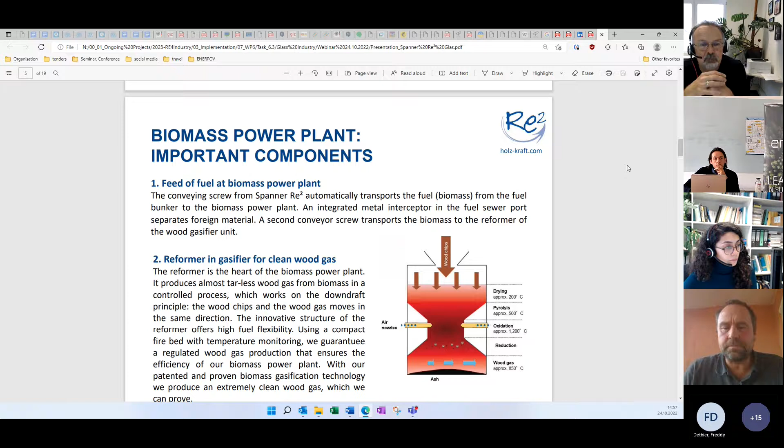The gasification process on its own, a little bit explained here on the side. I try to make a brief overview about everything, not knowing exactly how much the audience has heard ahead of that on gasification. But basically, you have a zone where we blow in either air, or we start blowing in water, steam mixed with oxygen. I'll explain later why. We have an area where we have approximately 1,200 degrees. At that area, if you manage it well, you have tar-free gas. Afterwards, you have a reduction zone where you try to get as much carbon turned to CO to make your gas more rich. Next page.

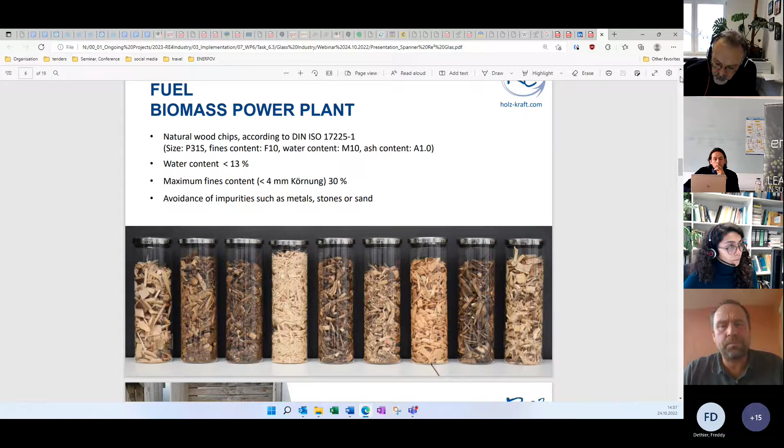As of today, we are very skilled in operating on different kinds of biomass. You see here a mixture of machines which are running more than 8,000 hours per year. We can also contain bark, but we also like the wood chips out of the saw industry. It's important for investors to have more possibilities on purchasing the wood. Next page.

We start operating machines on waste wood. Easy on that part is pallet materials, from pallets. We also are operating with, let's say, A2 wood, which is A2 material. A2 is everything that IKEA is - if you shredder what you have at home from IKEA, it's A2 wood. We are running a few machines on A3, but here we are already facing a NOx problem. One step more, please.

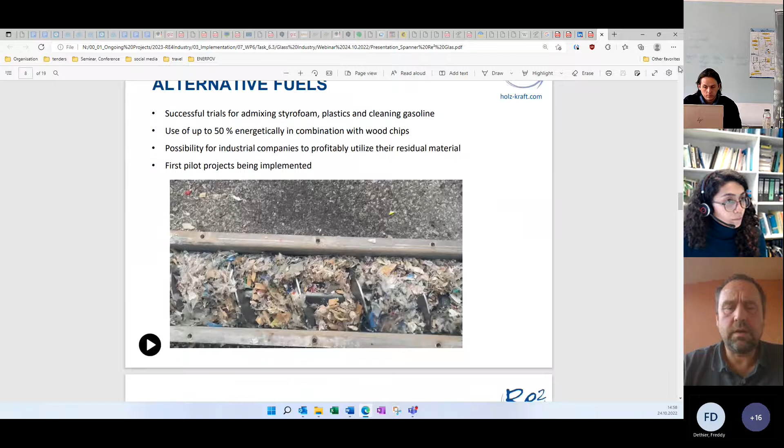I also show here we have a machine in Augsburg, and that machine is specialized on trying out certain residues. Here you see a mixture between wood and a material, PET, from the recycling area. So wood becomes only the structure of gasification, and we start trying out different materials. It's very promising, and we would like to increase this because we always get asked where all the wood should come from, where all the biomass is coming from, and we would like to become independent of pure wood in the future. But we still believe a lot in the potential of wood-based biomass. One step further.

This is a machine operated by Ecoloop close to Augsburg. Sto has also invested, and their target is to get rid of their styrofoam.

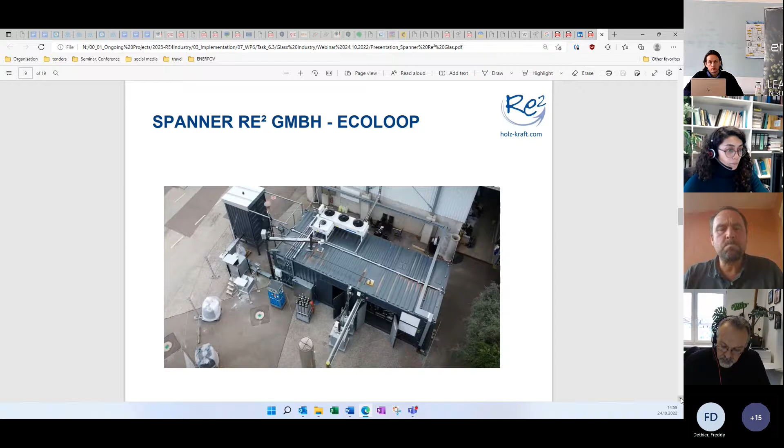Now we're coming to the Spanner Syngas. What are our properties? When we blow in air in our gasifier, the burner temperature is around 1,400.

At the moment we're focusing in the industry on applications. We have our first order coming from a brick plant. Brick plants have to achieve 900 degrees, and they need gas 5 megawatts all year long. So pretty much the same requirement as your industry.

That you have 8,000 hours of operation, or 24/7. The brick industry is moving the bricks every 20 to 30 minutes, and then they need zero gas. So at that place where we have 1 megawatt gas application now for tryouts, it's not funded.

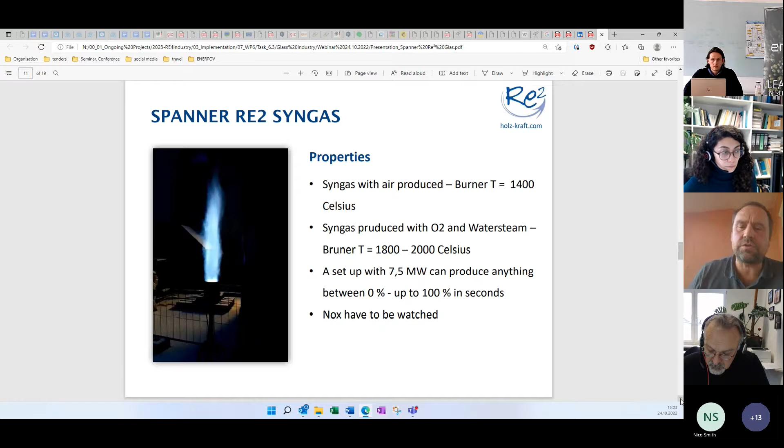I'll give you a brief idea how big setups can be. This is for a dairy - we showed them 3 different setups for a milk dairy making gas and electricity. This plant is around 1 megawatt electricity and 2 megawatt of heat.

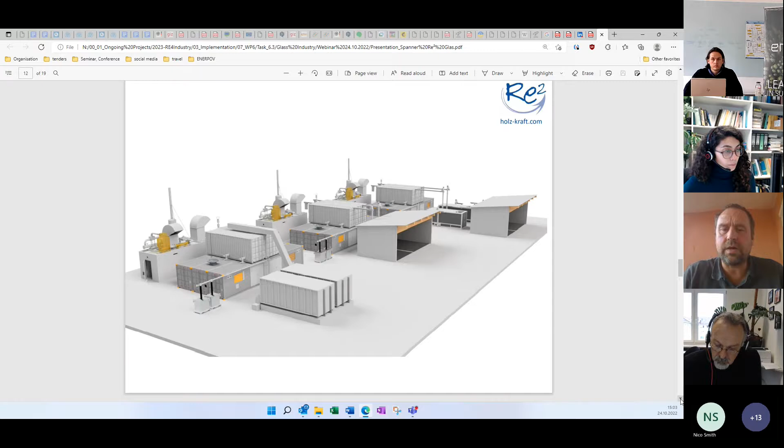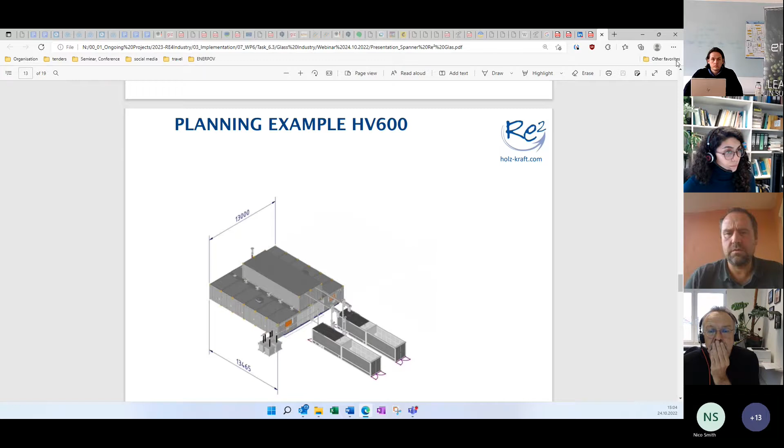And if you go to a higher level setup like this, you can manage on 13 by 13 meters, 7.5 megawatt on gas.

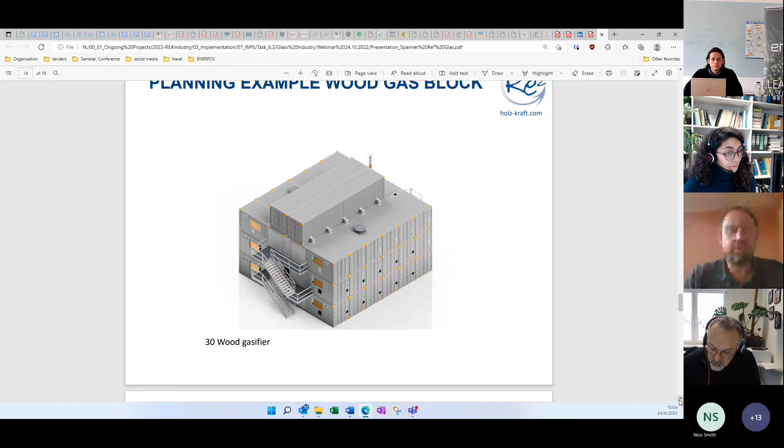The last few pages are just some pictures to see what we're operating. Since electricity pricing was not set high in Germany the last 10 years and gas was low, we've been all over the world, establishing a few plants in Japan.

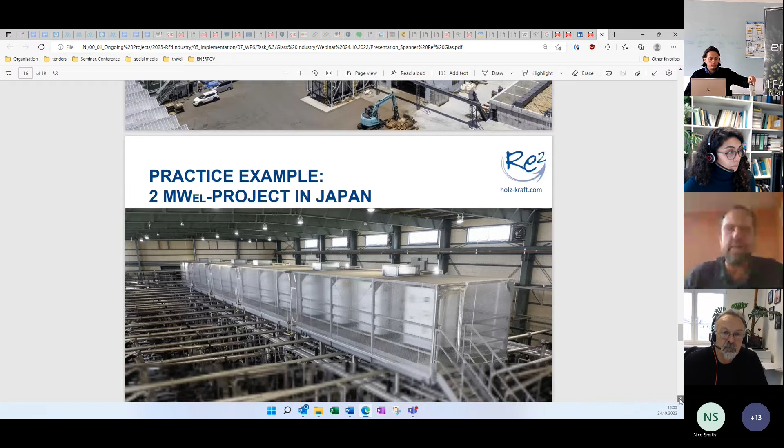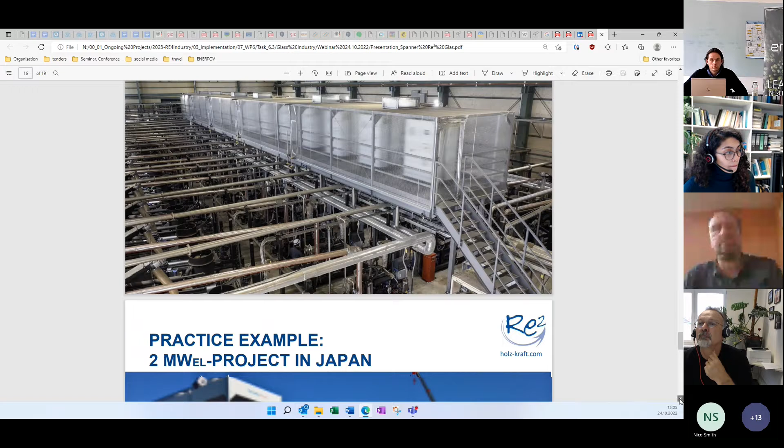Why we've been able to make projects like this with a lot of CHP and gasifiers next to each other - there are not too many well-established gasifier processes out there. The syngas history has a lot of ups and downs, and there are only a few companies which can show long references, and this gave us the opportunity to make these big projects.

When we quote today, we quote bigger motors, but we stay with the small gasifiers because it's very robust. This also involves all the wood chip logistics - to get a good stream of biomass, you have to be able to dry your wood chips and make it clean, get stones out, get metal out before it hits the machines.

And we can go, I guess, to the last page. That was a brief overview. As I said, it's the first approach for us, and I'm curious about your questions.